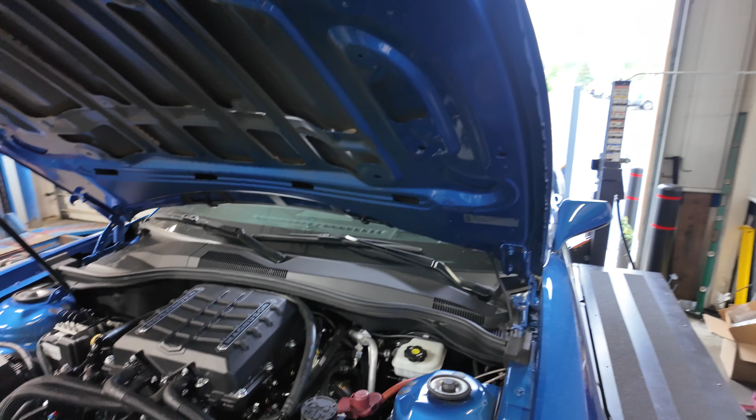So this car, as you can see, has some aftermarket stuff on it. This is a built short block - it's an LS3 originally, so this is a Camaro SS. It's got an LS3 block, factory block, with a forged rotating assembly, 4-inch crank, so it's got a stroker crank. Stock bore, so it ends up being like a 413 cubic inch engine.

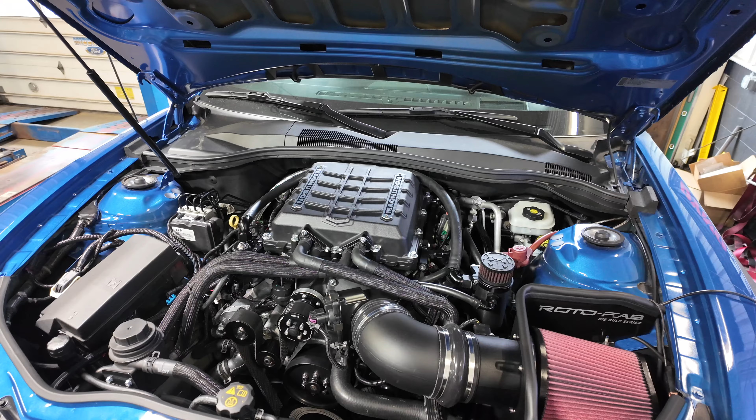The stock LS3 heads are ported. It has, I think, like a 223/243 cam - not sure who makes it, but it's definitely a Supercharger specific cam. Magnuson 2650 supercharger, Roto Fab 5-inch cold air intake, 102 millimeter throttle body. It's got a return style fuel system on it. We are doing a flex fuel tune on it. Long tube headers, 3-inch dual exhaust.

So this car is pretty worked over versus the stock 426 horsepower LS3. This is well over 1,000 horsepower at the crankshaft, seeing a little over 900 at the wheels.

One thing I do want to touch on first is the pulley combination. We're at about 15 pounds of boost on this, and I've done a bunch of pulls and got this thing pretty much all dialed in. Started on pump gas - made about 850 on pump gas with real conservative timing, then put some ethanol in the tank. Got the ethanol percentage up to about 70%, and now seeing about just over 900 at the wheel.

We did want to go farther with the boost, and the owner of the car did too, but we were struggling with the tensioner and belt setup. He had a different style tensioner for it that we tried, and I put a 2.75 upper pulley on it, but I could not get the belt to stay gripped on that supercharger pulley.

So this being a Camaro SS, unlike a ZL1 - the ZL1s have three belts. The main drive belt that drives the water pump and alternator is spaced in further, more like Corvette spacing, and then they add a third belt - an AC drive belt, and then a supercharger belt. This setup is still the Camaro SS drive, so we're trying to drive everything off one belt, and it becomes kind of a challenge with tensioners at that point.

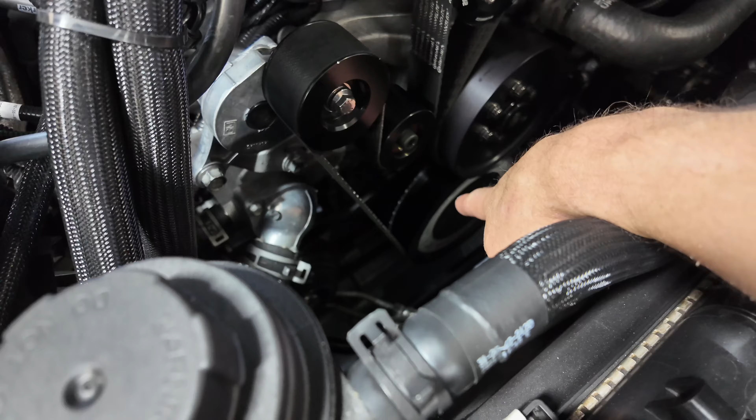So can't go any bigger on the crank pulley, because down here it already has an overdriven crank ATI balancer, and it gets really close to the water pump. You can't really go any bigger on the crank pulley, because the water pump pulley has to be bigger to compensate for the overdrive crank. So these 10-rib kits are cool, but because the crank is bigger, to not overspin everything else, you've got to make everything else bigger - alternator, water pump, different idlers, whatnot.

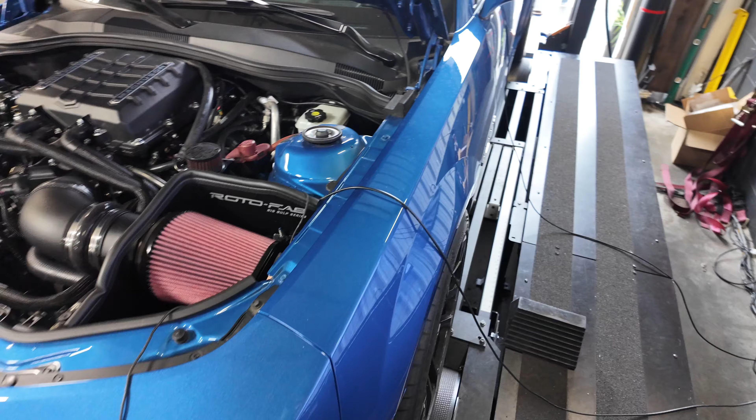So that's kind of our limitation on this one. 900 at the wheel is still nothing to sneeze at in a fifth-gen Camaro. It's still a really fast car, especially since this is a stick shift car - it's a manual trans. It's still a lot of power, easily spins the tires unless you've got a drag radial or something on it, at pretty much any speed.

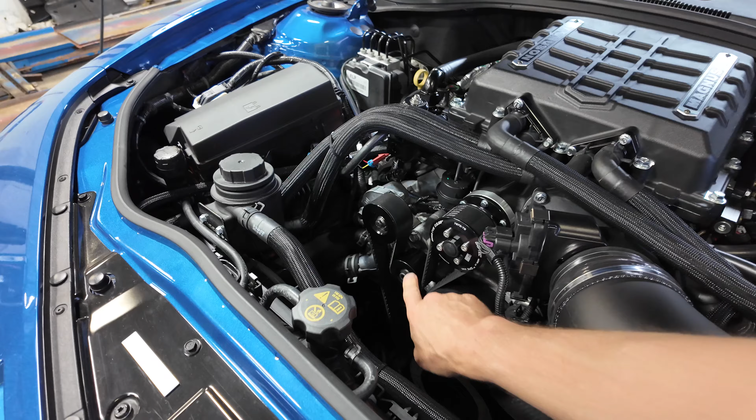So for now, this is where we're at - that's the boost we're going to run on it for now. He's going to maybe think about reworking some drive stuff this summer, maybe in the fall. So I'm getting it dialed in with this setup as it is. I went back to a factory style tensioner - this is just a factory LS3 tensioner. There's a couple companies that make some really stiff tensioners, but it requires some other stuff reworking, some idlers, and it gets kind of involved versus just doing an LSA drive. So anyway, enough about that.

Here's the dyno graph so far - 910.

Low 20s for timing, about 22 degrees. So this was last Friday, and I'm just going to do one more just for video's sake, and kind of do a walk around. Car sounds really good with the dual 3-inch and the cam. It's got a nice pushrod GM chop to it.

But I'm really happy with the curve. Curve looks really awesome, typical Magnuson 2650 curve you see. Real flat torque curve. This is a bigger inch engine, so it's going to make a lot of power down here. At 3,500 RPM, we're making 800 foot-pounds. If you compare that to the GT500 stuff you'll see on the channel, we're making this kind of power pretty easily with bolt-on stuff on E85, but not 825 torque.

We're like 650 torque. I think my car is like 930 at the wheels and like 640-something torque. So obviously the bigger inch engine is going to put a lot more meat down in the bottom versus a Coyote-based engine that's spinning to 8,500 and making all this power way up in the RPMs. A little different experience, but these things just feel, they're a heavier car like an S550, and with this kind of torque, it gives them a lot of shove down low for sure. So a lot of fun to drive.

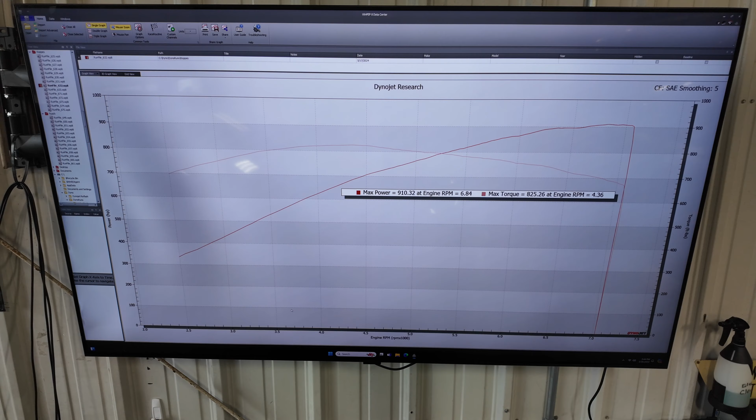Yeah, I think it'll probably be about the same. I did one more last Friday after putting all this back together, and this is actually that run. So I think it made a couple other pulls that made real similar power, and I was kind of playing with some timing and fueling and stuff, just getting some stuff smoothed out, and trying to get as much E85 into it as possible. I think right about 70%.

So I'm going to get this thing warmed up. We'll do one more pull on it, and we'll take a look at the data log and the final numbers.

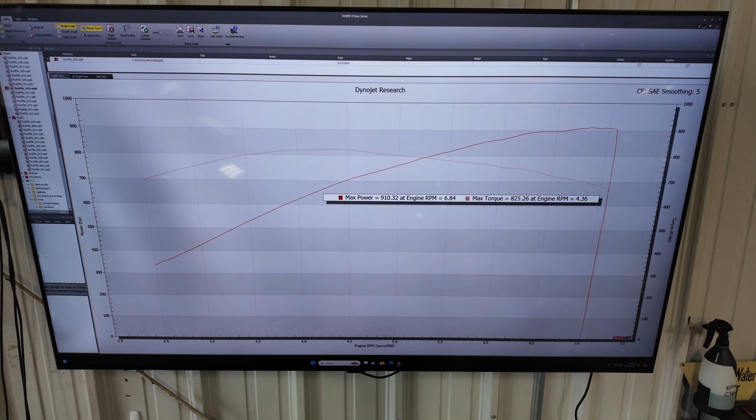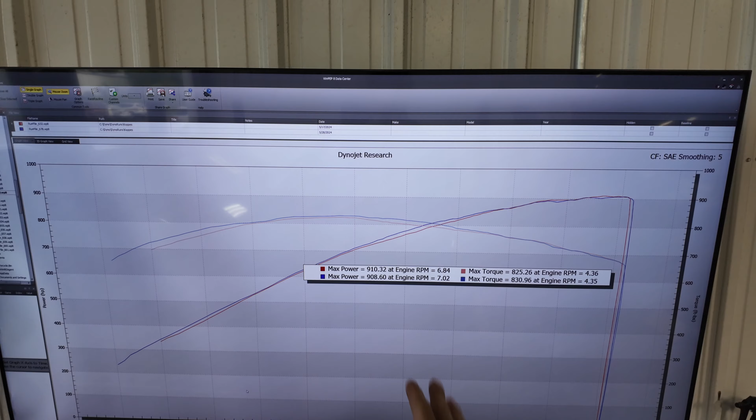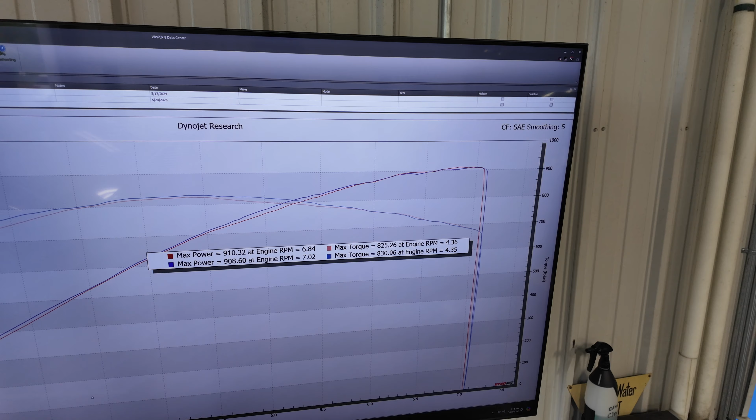So you can see I pretty much backed it up. A little bit more mid-range here. Kind of wavered around back and forth up top, kind of switching back and forth here. But it was within 2 horsepower. I call that repeatable for something making this much power. Torque within 5, horsepower within 2. So yeah, that's about where we're going to be with this one for now on that boost level.

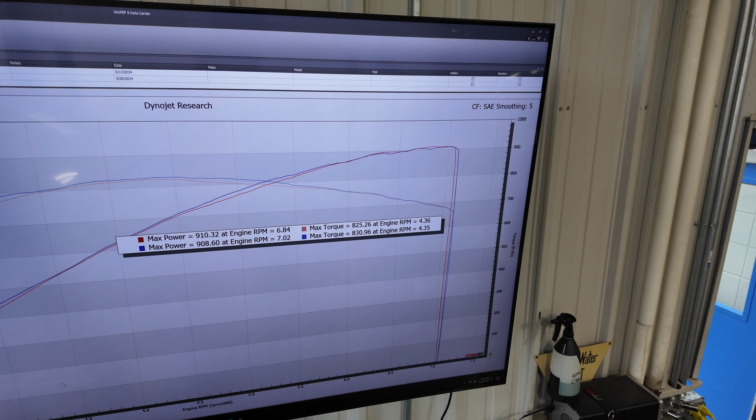So a little cooler today. I'm seeing maybe about 16 pounds of boost today, but obviously the correction factor on the dyno is going to be less too. So I can maybe talk about that right now.

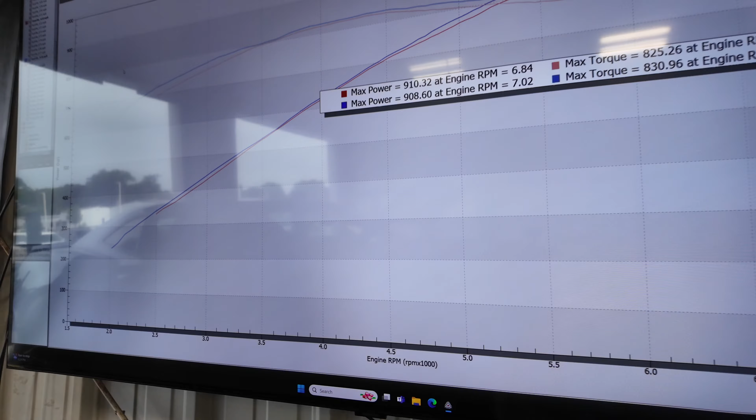So I can bring up the dyno here, I can show the run conditions, and you can see what happens is the correction factor when it's warmer out. So last Friday it was warm and more humid - I shouldn't say more humid, it was less humid, it was warmer. It was 13 degrees warmer.

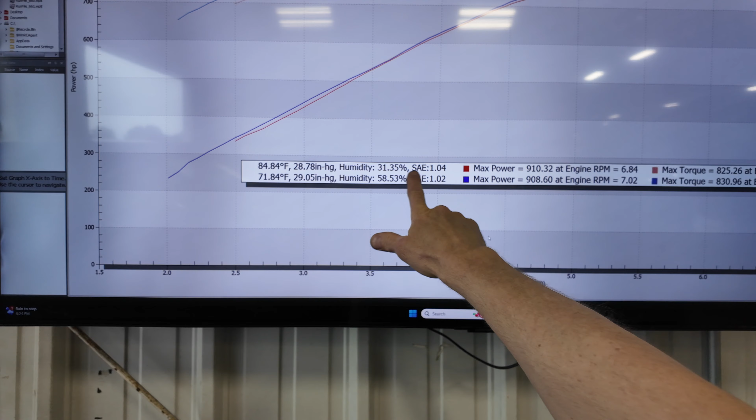So the red run was 84 degrees, 31% humidity. So the humidity was good, but it was a lot hotter, so the correction factor was 1.04. That means that the dyno, on top of just the uncorrected number at the roller, the dyno software is adding 4% on top of that.

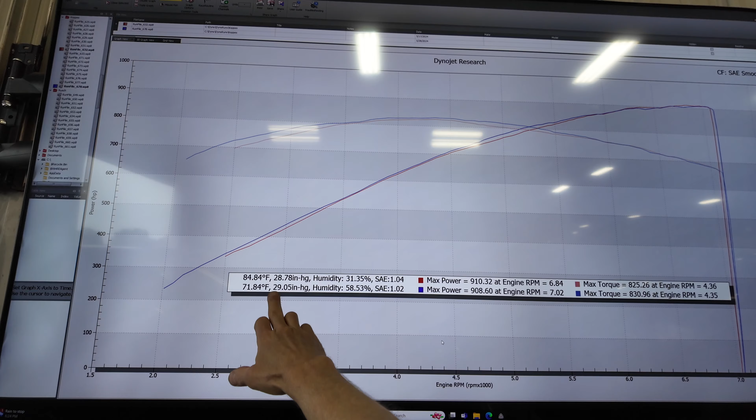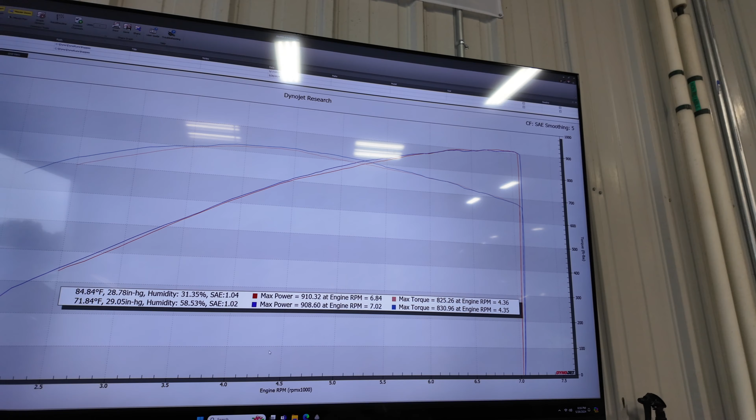The run I just did, the one you just saw, being 71 degrees, so cooler temperature, a little bit higher on the barometer. Humidity's up a little bit, but not enough to make a difference here. You can see it's adding 2% over the uncorrected, raw numbers coming out of the dyno. So that's how the correction factor works.

It's going to correct to a set standard, which is SAE, which is what I run these in - what the cars are rated from the factory with. Any modern car made in the past 30 years, or even longer, uses the SAE correction. They've updated it in the past 20 years to the current one that I use here.

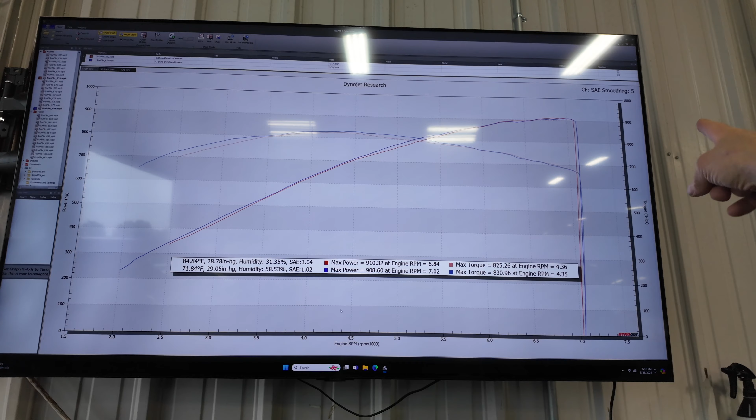A lot of dyno guys, a lot of shops are going to use the standard number up here, which standard correction is something that was used back in the 60s, before everything had those super inflated numbers. They were using gross power standard, which would inflate the power numbers drastically.

I use SAE because that's what GM uses, that's what Ford uses, that's what Porsche uses, that's what BMW uses - all these cars you see, when they're certified for the EPA by the manufacturer, they use an SAE correction at the crankshaft. So that's what we use at the wheels. That's, I believe, the most accurate. If I ran this thing at standard, it'd probably be making 925 or 930 at the wheels, but that's just not realistic.

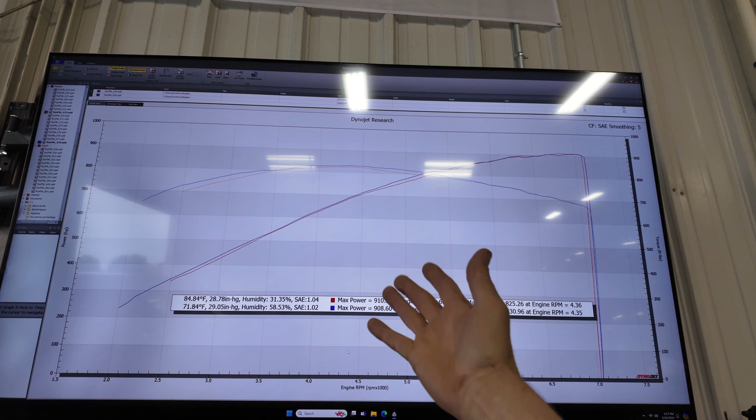That's something to pay attention to, guys. If you put your car on a dyno, you don't always get told what the actual correction factor is, because that just depends on the weather. It's rainy and chilly here today, so it's kind of weird. We got high humidity, but cooler temperatures than we did last Friday, where it was drier but a lot warmer.

We got a little higher pressure today. So that's how this kind of changes. Sometimes you got to look at this, sometimes I look at this to kind of see.

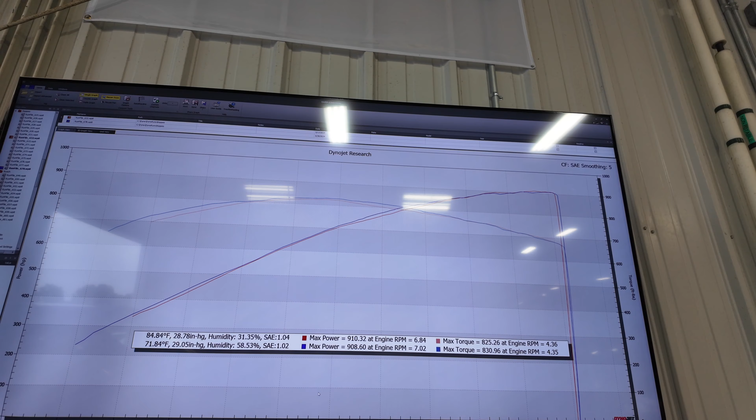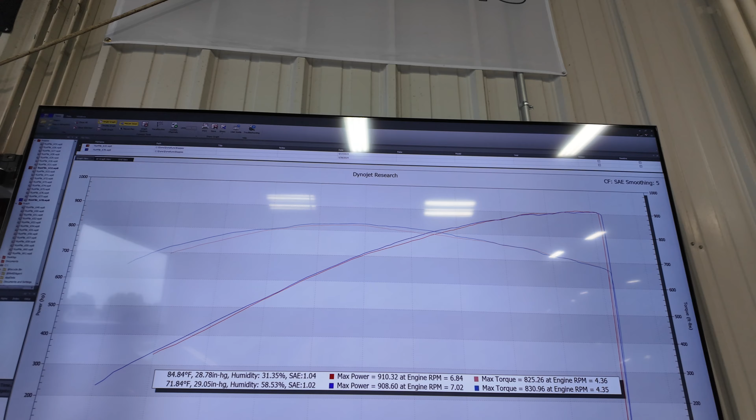I'm mentioning this now because I'm dynoing this on 2 different days. So I always go back, if I'm trying to compare 2 different numbers or 2 different dyno runs that aren't the same day, I'm always gonna look at what the correction factor is and look at the weather and be cognizant of that. I know it's nerding out a little bit about this stuff when it comes to dynos.

Sometimes you see people ranting and raving all over the internet about how dynos are BS and don't spit out real numbers. When it comes down to it, the dyno is a tuning tool for us, and it's before and after. This car obviously just came to me finished, built, ready to be tuned.

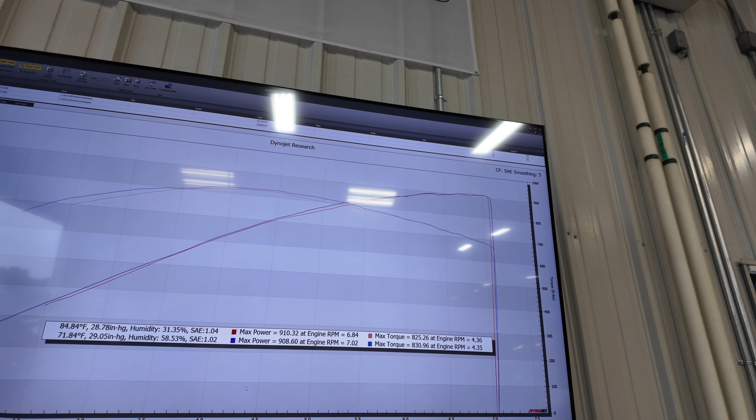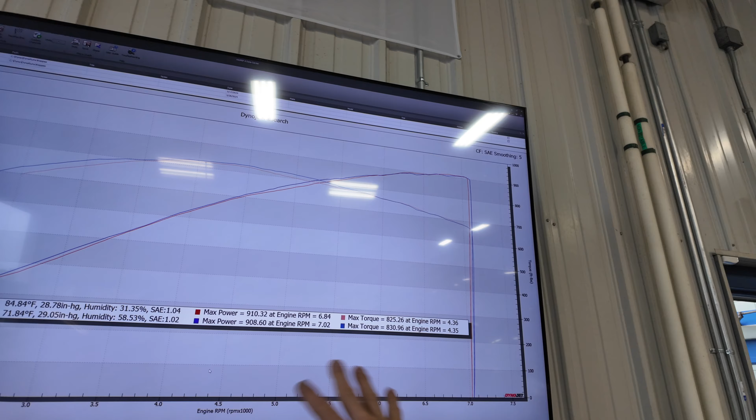So I'm just gonna be outputting numbers. Since I couldn't get this all done in one day, one day is this, the next day is that, and I gotta look at the correction factor, and I will look at it. But when I say repeatability, because we have different days here, there's gonna be a little bit of a skew on how this thing is correcting, and there's this dyno.

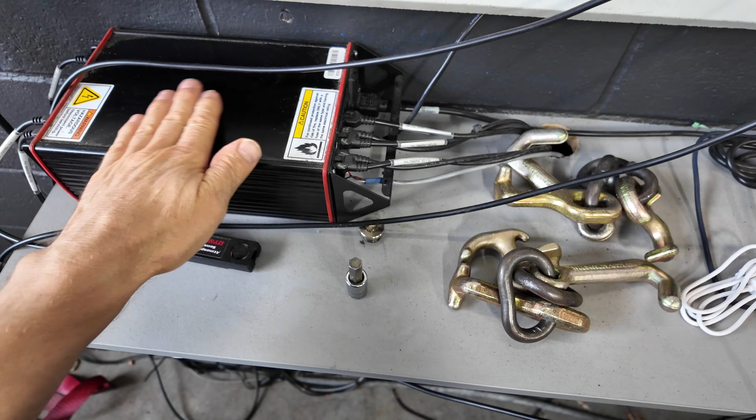I know you guys can take a look at this while we're talking about it. So my dyno stack here, this is the dyno stack. This is what's taking the information from the drum, the wheels, the speed, how fast it's accelerating, and all that stuff, and it's taking this little thing. This is from DynoJet.

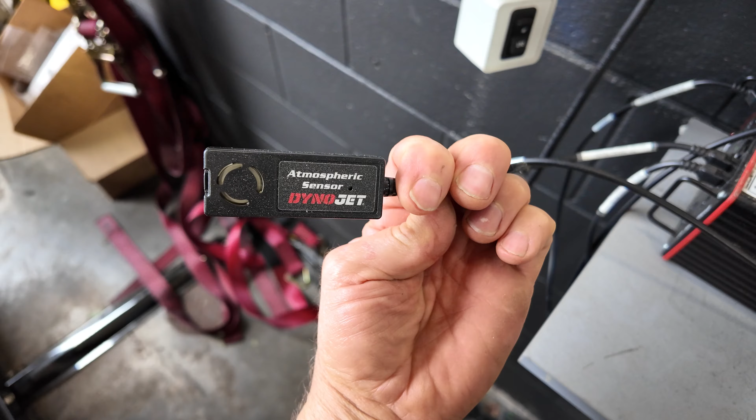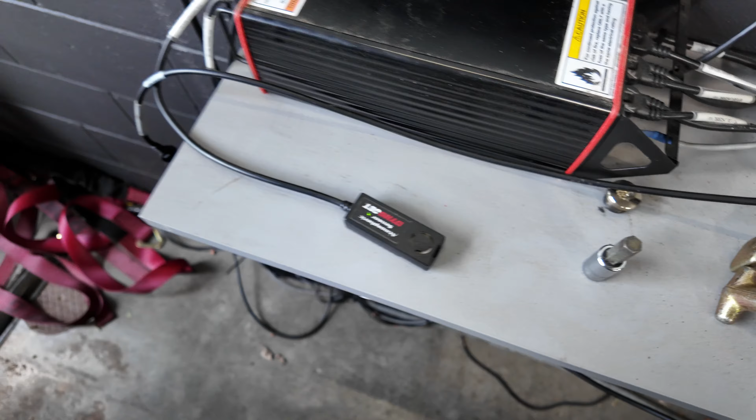This is an atmospheric sensor. It has the temperature, the pressure, and the humidity all built into it. There's a little sensor inside there, and a little fan that draws air in. I just set it right here, sitting next to the car, next to the door here. So we're reading fresh air coming in from outside, and this is the deal.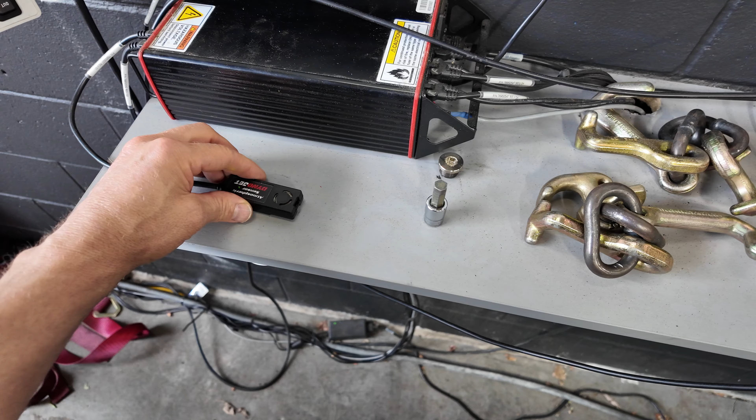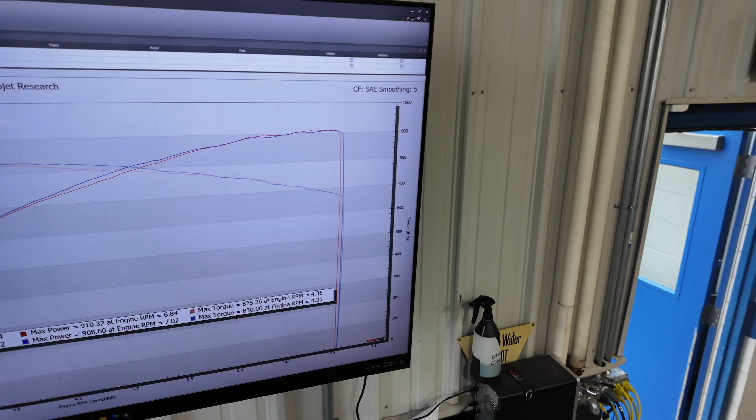This is what's determining what our correction is based on the SAE, correcting it against the SAE standard. So that's where we're at with this one. I'm pleased with what this is making for the boost level. If we could put another 2, maybe 3 pounds of boost on it with that 275 pulley, I think we would get really close to that 1,000 wheel.

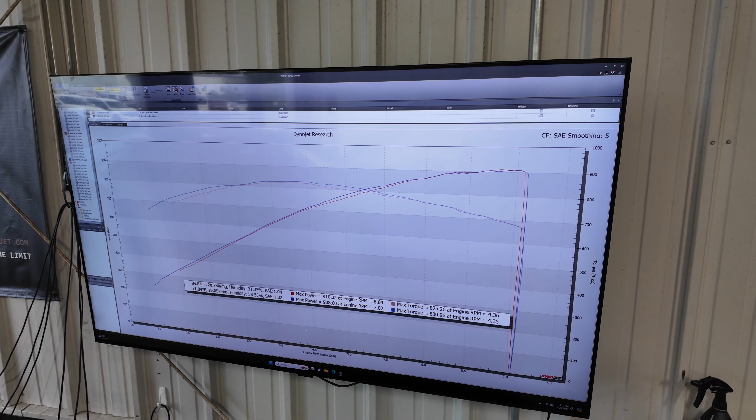Sometimes you struggle with an unported Magnuson, especially since Magnuson changed the casting a couple years back on these 2650s. They moved the foundry somewhere else, and the inlet design on these things that originally was designed got a little fatter and chunkier in there, and stuff wasn't as streamlined coming in through that inlet. So porting goes a long way on these newer style Magnusons.

When these 2650s originally came out, this style and the direct injected like 5th or 6th gen Camaro and C7 Corvette, when those originally came out, we were routinely making 1,000 wheel plus with those without any porting. They updated the casting, added some material, the foundry changed and the design changed a little bit, and now sometimes we struggle making 1,000 wheel.

But still making a lot of power. You can have this thing ported. We can see a 4-digit number eventually if we get the drive system figured out, like I was mentioning in the beginning of the video.

So let's go take a look at the dyno data log. Bear with me while I pick up my computer here so we can take a look at the screen. I'm always fighting with this reflection from the door being open. Okay, let's center this up.

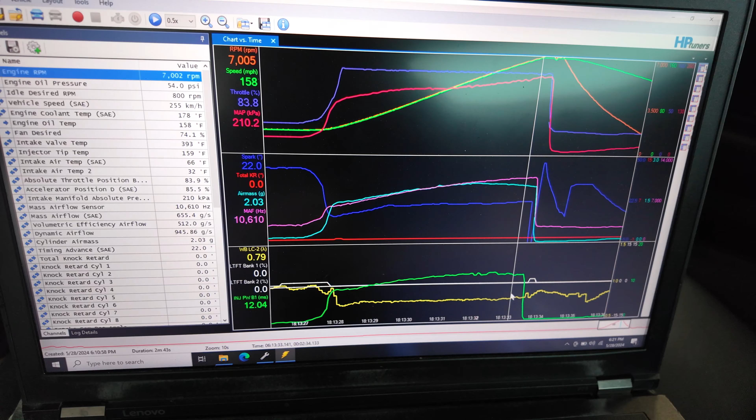So we can kind of take a look at what I got going on here. Air fuel, that yellow line at the bottom. You can see where I'm trying to get that 0.78 to 0.80 lambda, which I'm pretty much spot on. There's a little bit of a rich dip there, that was from whacking the throttle open, that transition fuel.

Move up to timing, here's my knock line. You can see when I first whacked the throttle, I just got a tiny little smidge of 0.2. That's kind of typical. You can see how I'm ramping timing in here. It was really wanting to knock in here, so I pulled some of the timing out of it down at the bottom. That did not affect the torque number at all down there, it just made the knock sensor happy. And you can see I'm pretty quickly ramping the timing in.

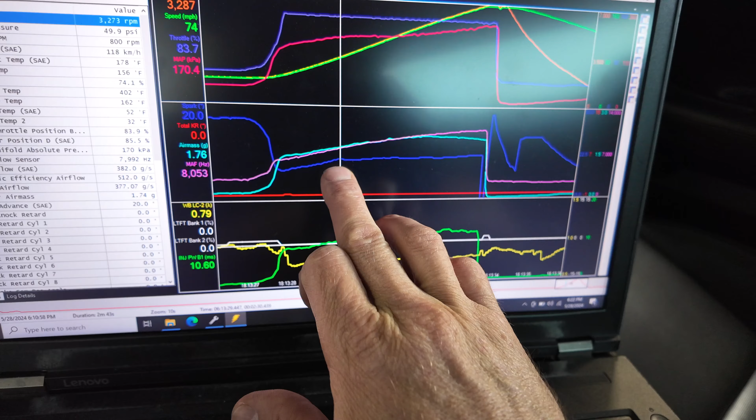Now the 2650s, and we'll move up to the boost line here, kind of this pink magenta line. You can see how down at 2,000 RPM we have like 7 pounds of boost, and that's what I really like about these Magnusons. They kind of bridge the gap between the older 3-lobe stuff that just wanted to make, like the C7 Corvettes and 6th gen ZL1s, they want to make all the boost down here, and then when you put headers and airflow mods on them, they'll just kind of taper off, which to me is just backwards from what you want.

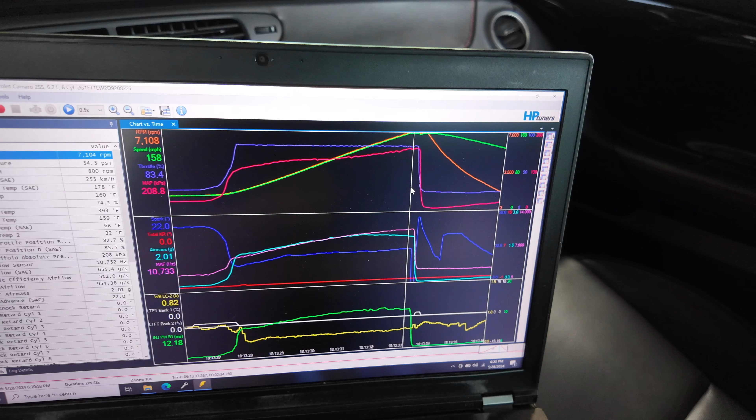You got a street car, you're driving this thing around, especially a stick shift car, it's nicer to have kind of a ramping boost. So you can kind of see, if I can get around this darn reflection, that's like 7 pounds, and then we'll move to like 4,000 RPM, we're like 12 pounds, I'm gonna call it, at 174, and you can see how it just slowly ramps in, and we're hitting 16 and a half right at the tippy top there at 7,100. And you go back to the dyno graph, it's really starting to flatten out at 6,500, 6,800, so I'm revving this thing to 7,200. I think I have the limiter in at 7,300 or 7,400.

He's got good parts in this thing. He could probably spin it higher, but I don't know that there'd be an advantage to that.

Because of this ramping boost curve, a lot of the time you'll see this with centrifugal cars, a lot of the time with a centrifugal car you'll kind of see a little bit of a dip in the middle too, because the boost is ramping in so hard in the mid-range here that you actually almost have to take some of the timing out of it, especially on pump gas. E85 obviously is what I just ran this on. You can have, with this kind of gradual ramp in boost, you can kind of pretty much just flatten the timing line. That's usually where they like them, these LS engines, that type of timing curve for this type of boost curve.

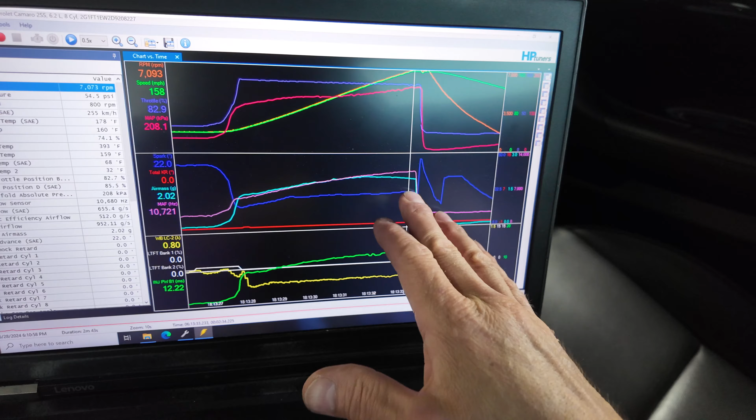So this is ramping just a little bit. It was making another... holding this thing at 21 degrees all the way out versus 22 up at the top. It made another 5 or 6 wheel with an extra degree up in the tippy top here, so I just left it. It's kind of, for me, that's kind of like hit or miss whether I'm going to leave that or not. Just with the way that the power was kind of flattening out, adding this in kind of helped it step up a little bit as the boost curve ramped up. I left it because obviously that's just what the engine liked.

Otherwise, yeah, the rest of this looks good, my air fuel's nice and flat. Another thing I always look at, 2 things I will look at on GM cars that are mass airflow sensor - now this is still MAF. This is running a 2-bar speed density / mass airflow blended tune. So below 3,000 RPM, it's map and mass airflow. I'm using the map for the transitions. I do zero out some of the predicted fueling, so otherwise you can get some lean spikes at the beginning on some of these big injector cars. But above 3,000 RPM, it's mass airflow only.

And these blade style MAFs on these late model GMs, anything Gen 4 and 2008-ish and up, the blade style MAFs work pretty good, especially in a draw through application like this, like NA or this style blower, a Valley style blower like a twin screw or a Roots. They're very accurate, so you can see that my MAF curve here, this purple line, this kind of light purple line, is very nice and smooth. You get into ProCharger stuff, Vortech stuff, where you're doing a blow-through MAF, where you're pushing boost across the mass airflow sensor, and this can start getting really jagged, and then it doesn't work so well all the time.

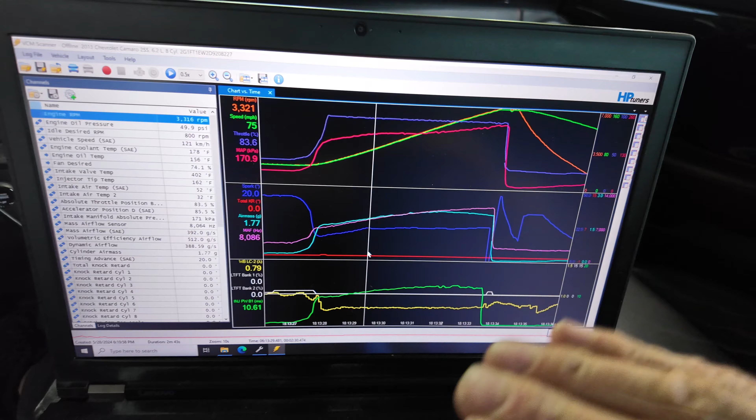When you're using a mass airflow curve, you want to make sure that if this mass airflow curve starts getting really jagged, your injector pulse width is going to start doing this, and your air fuel curve is going to start getting really jagged, and you end up with individual combustion events that are lean then rich, jumping back and forth, and the wideband won't really catch that.

It might look a little more jagged, but you end up with some kind of inconsistent combustion. So that's really one thing I look at when you start getting these jaggedy injector pulse widths. I look at injector pulse width. I don't really care about duty cycle, because I know 20 milliseconds at 6,000 RPM is 100% duty cycle, so it's something I just have in my head. I like actually seeing what the ECU is commanding for a pulse width, so I can see what it's doing.

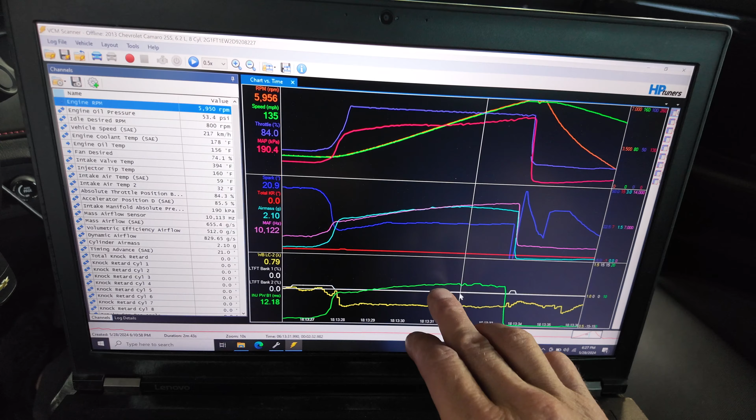So one thing that I am noticing on this car, and I will let the owner know, I noticed on the last two pulls, the final pull last week and today, and this one just now, there is a little bit of stepping around on the injector pulse width.

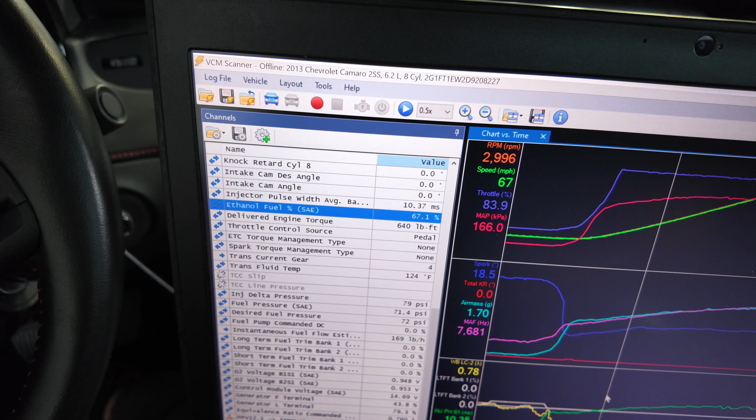And what I'm noticing, and this is another thing to look at, I've seen this in some of the flex fuel stuff, is, and I'll just kind of scroll, you can see how the ethanol content is kind of moving around a little bit. It was 66 - I know I had said 70, but I was seeing 67 before, and you can see how it's moving around: 65, 67, 66, 65, 63, 65, 64. So it's kind of moving around, even down to 60 there.

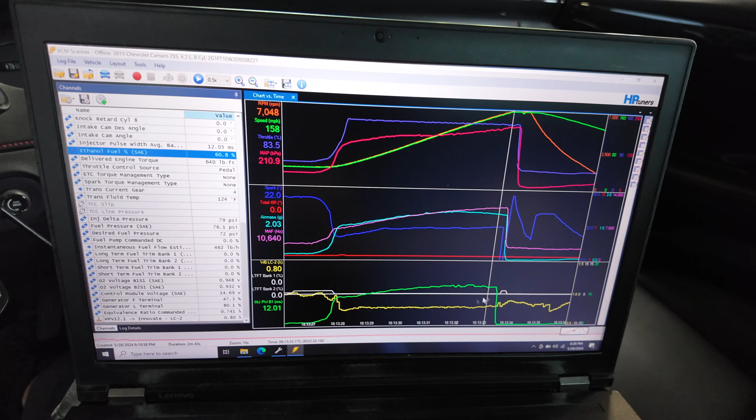So I'm going to have him check his wiring and go back over, make sure that everything is grounded and powered properly on that flex fuel sensor, because that should not be jumping around that much. Maybe a percent or two isn't going to affect much, but when it starts jumping around like 3-5%, that's enough to start affecting the fuel by a couple percent. And in a situation like this, you don't want that. So that might be why my injector line is just getting a little funky down in here at the top.

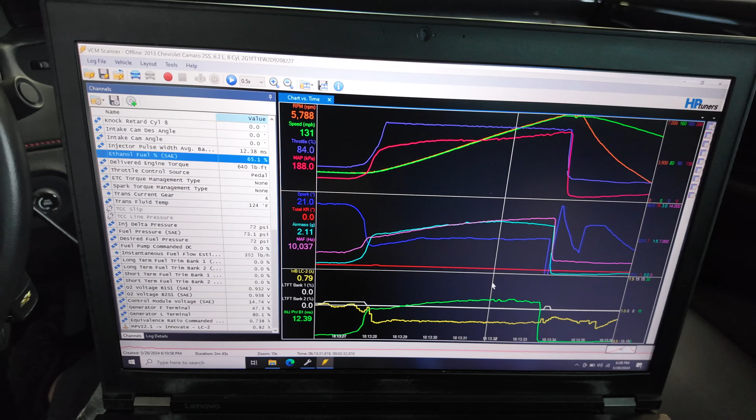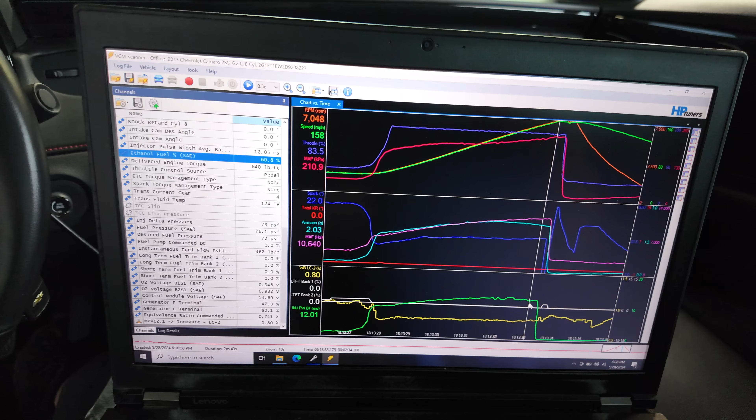But otherwise, these are all just little details that I look at. I know I like talking about this stuff for you guys. If you're interested in it, you already kind of saw what this thing put out. I went over what the car was, what the build was, and some of you probably tune out after that. But as far as how my tuning process goes, that's what I like to share with you guys.

I've been tuning GMs for over 20 years now, since the beginning of HP Tuners, way back over 20 years ago. Just sharing my experiences, sharing all these different builds that we do, and we still have fun with this stuff even 20 years later.

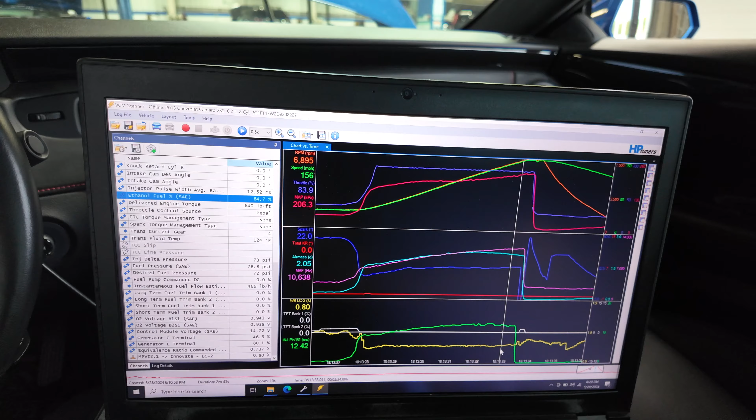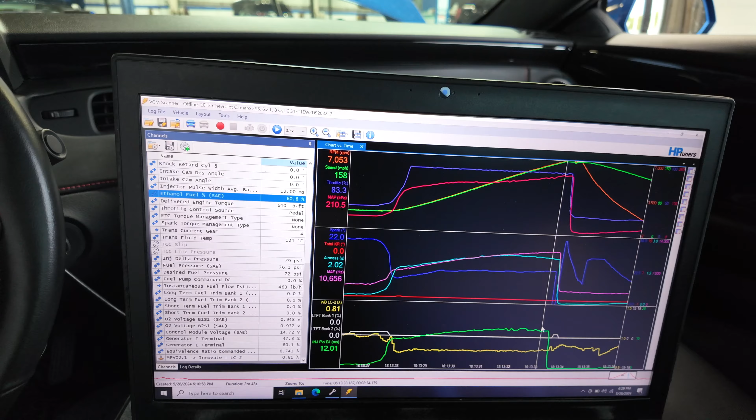Sometimes it's obviously still work, but it still gets to be fun sometimes, especially when you get to see this gentleman who built this car himself, put it all together with the help of, my understanding, maybe a couple friends. I think it turned out really nice, very nice under the hood, and well executed. You like to see the smile on their face when you show them the dyno number and they get to go cruise it around and stab the throttle for the first time.

He did have a Whipple on this car before, so he's been through a couple iterations of this build, but this is kind of the 'let's pull the motor and put some forged parts in it and do some more work to it' stage.

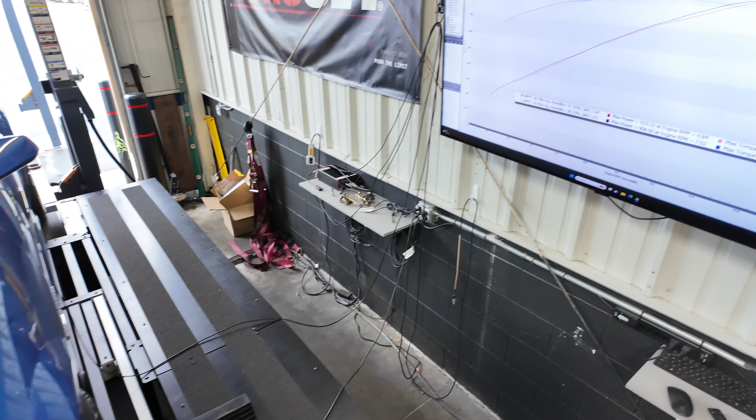So yeah, that's going to finish it up for this for now. Like I said, we'll probably do some further stuff on this car in the future with adding some boost. So that'll wrap it up for this one, guys.